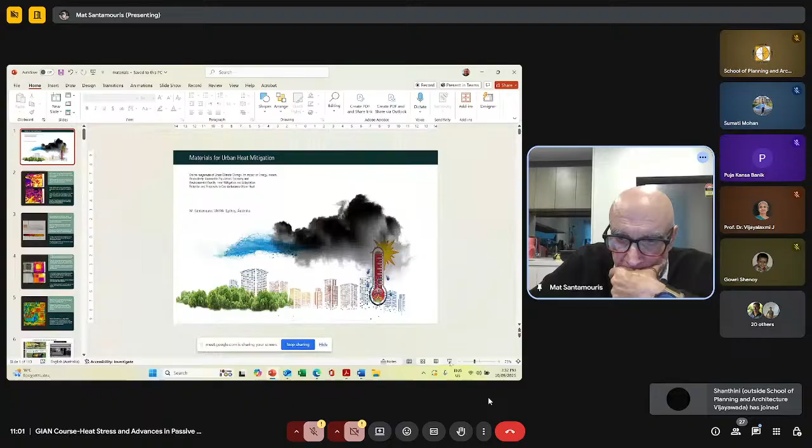So why is it important to discuss materials? Because the climate of the city is very much determined by the thermal and optical properties and characteristics of the materials used in buildings and also in urban structures. Materials determine the urban climate. Why? Because materials are characterized by an ability to absorb or reflect radiation, mainly solar and thermal radiation, and also because they have a capacity to store and release heat back to the atmosphere, heating or cooling down the atmosphere.

Materials used in cities are characterized by a reflectance, and the broadband reflectance is called albedo. The materials' albedo determines the albedo of the city, and an increase of the albedo has a direct impact on the energy balance of a building. Once we have large-scale changes of the albedo of the city, this may have very important indirect and direct effects at the city scale.

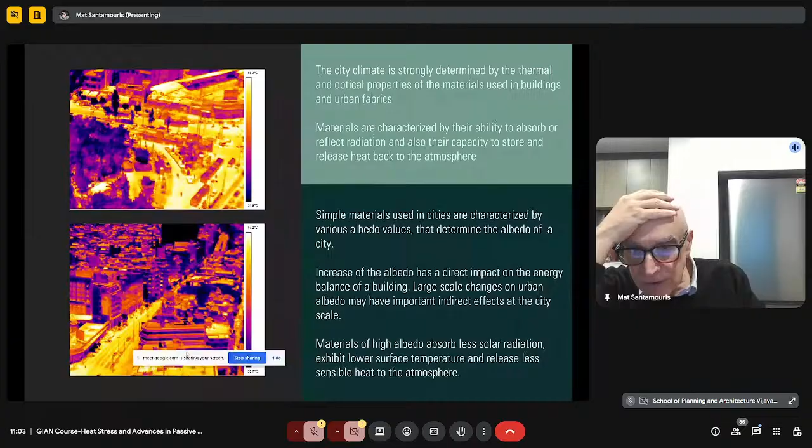Why is this? Because materials, once they have a high albedo, reflect a lot and can absorb much less solar radiation while reflecting much more. So they present a much lower surface temperature, and because of the lower temperature, release less sensible heat to the atmosphere and contribute less to the increase of urban temperature.

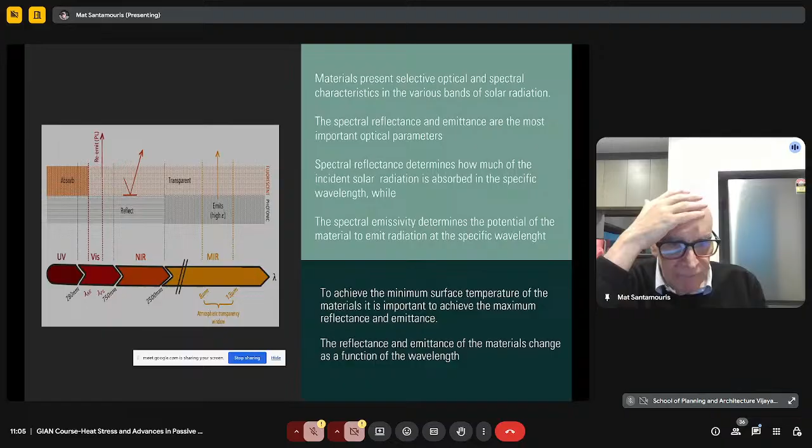Materials present very selective optical and spectral characteristics in the various bands of solar radiation. Let me present the main bands of solar radiation. We have UV radiation, up to 280 nanometers. Then we have the so-called visible radiation, between 280 to 750 nanometers. This is the part of solar radiation that the human eye can observe and understand. The human eye cannot understand the other bands of solar radiation. We have the near infrared, from 750 to 2500 nanometers, which is very important because it contains the same amount of energy as the visible part of solar radiation.

We can say that 50% of the solar radiation which comes to the atmosphere is in the visible, and the other 50% is in the near infrared. Of course it's not exact, it's almost 50%, but the impact of near infrared is extremely important. Then we have the mid infrared, which for our applications is not really relevant except if we have to do with the properties and characteristics of the urban atmosphere.

So we have to understand that each material has a spectral reflectance and emittance, which are the most important optical parameters. The spectral reflectance determines how much of the incident radiation is absorbed at a specific wavelength. The spectral emittance determines the potential of the materials to emit radiation at a specific wavelength. These are two very important properties that determine the thermal balance of the materials.

What has to be understood is that the spectral reflectance and also the emittance present different values at different wavelengths. The materials are selective, they don't have the same properties in the different bands of solar radiation. This is very important because it allows us to define which kind of parameters we want to use and how to use the materials. But the materials have to be considered based on their selective optical properties and not on their broadband properties.

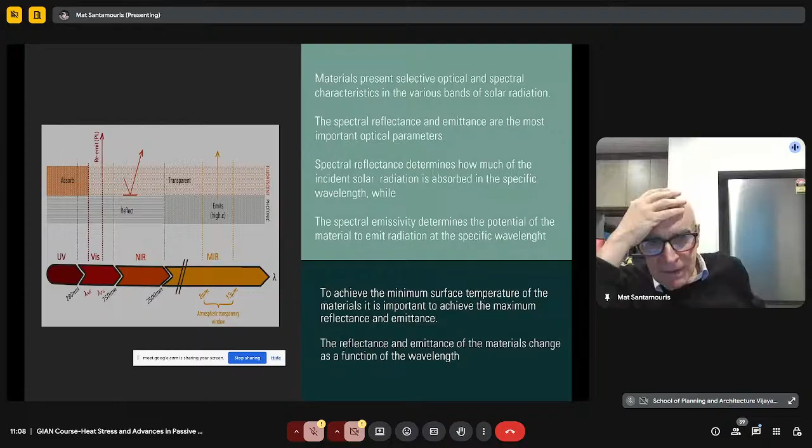The emittance of different materials is not the same. For example, concrete and other building materials present a quite high emittance. These materials can emit radiation back to the atmosphere and so dissipate the excess heat.

On the contrary, metals, for example, present a smaller, let's say, emittance, and they don't have such a high capacity to emit the solar radiation.

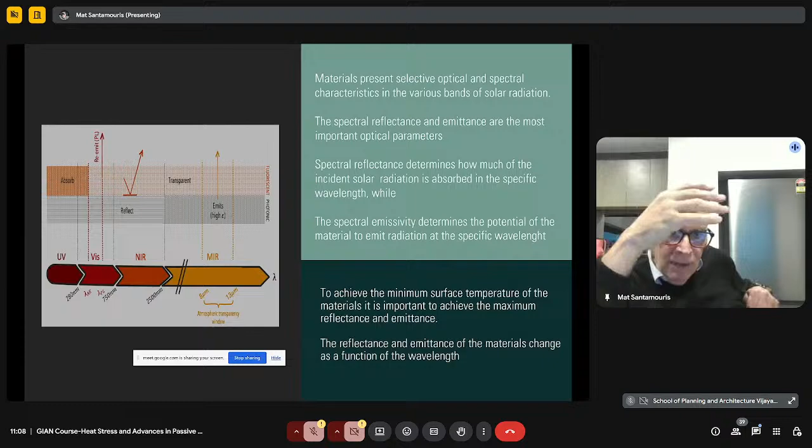What has to be understood also is that the emittance at a specific wavelength of a material is equal to the absorbance of this material at the same wavelength.

So if we take, for example, a material and we check how much this material may emit at a specific wavelength, for example, in the atmospheric window, 8 to 13 micrometers, we have to understand that a high emittance at this specific wavelength means a high absorbance also at a specific wavelength.

Which means that if really the material emits a lot at this wavelength, it absorbs also a lot at the same wavelength. So this is very important.

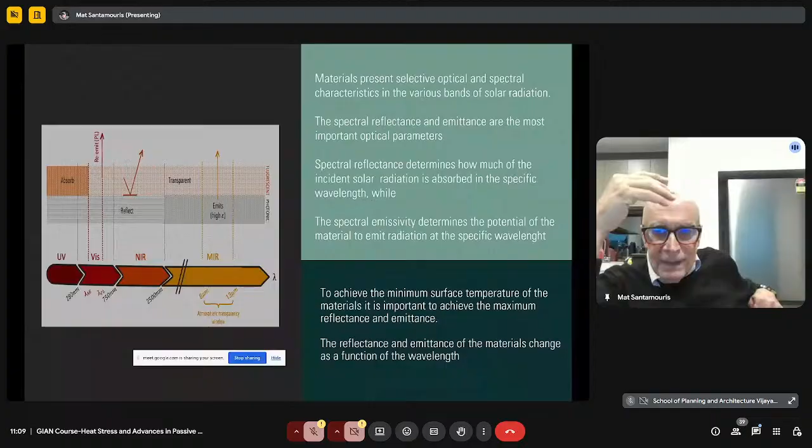This is the so-called Kirchhoff law that has to be understood in order really to design the proper way, let's say, materials for the urban environment.

In reality, the spectral reflectance of the materials in the visible wavelengths determine the color of the materials, because the human eye can really understand only wavelengths at the visible part.

And what really it gets back and characterizes the color, it is really the reflected radiation by the material.

So a material which reflects a lot, almost at all wavelengths at the visible spectrum, is a material which has a light color, can be, let's say, a white color.

Materials that really present a very high absorptivity, so a very low reflectance, these materials present, let's say, high absorbance, and these materials have dark color.

They are black. Then, if the materials reflect at the green, these are green materials, and so on.

But because this material presents in the visible part a high, let's say, absorptivity or a high reflectance, it does not mean that in the infrared they have similar, let's say, optical properties.

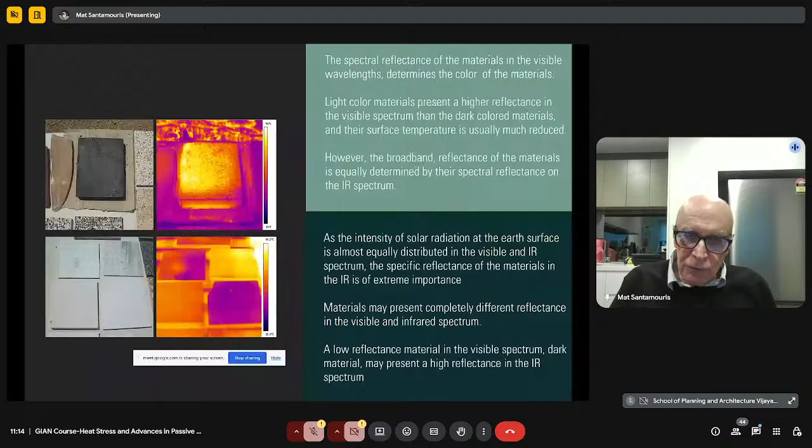So this is a very clear, let's say, message to you, and please remember it.

Given the different properties, we have really different broadband absorptivities and reflectivities. What means broadband? The global reflectance or absorbance of the materials - what characterizes the whole material. This is the weighted average of the reflectivity in different wavelengths, given also the intensity of the solar radiation at the specific wavelength.

A material which has a very high broadband reflectance is a material which presents low temperature, while a material which has a very high broadband absorbance may present a much higher surface temperature because this material really absorbs a lot of solar radiation.

Given these optical characteristics of the materials, we can really understand and measure their performance and temperature by using different experimental techniques, including remote sensing techniques like satellites, airplanes, drones, in combination with infrared thermography to measure their surface temperature.

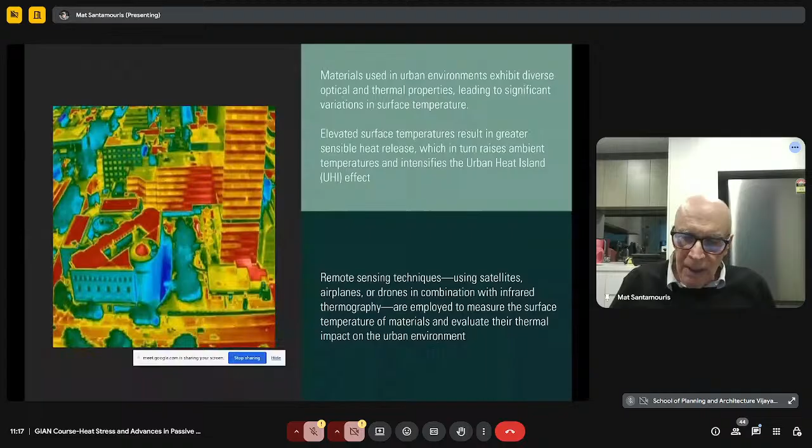This is very important, and this is the main technique used to perform experimental campaigns in the built environment. I'd like to show you some of these experimental campaigns we're using in my university, but these are very common everywhere in the world.

For all the experiments we're doing in the built environment here in Sydney, we're using a drone with a thermal and a visual camera. The drone may fly over the surfaces and take pictures of the surfaces. Then based on the characteristics of the surfaces, we can understand the temperature of the materials.

You see, for example, some pictures that we can take from the area. Of course, this is not so simple. It is not just what really the screen shows. We have always to correct for the proper emissivity of the materials.

For example, if flying a camera on a drone and you measure the temperature of metals, what perhaps you have really got is wrong, because metals present a low emissivity. So in this case, you have to enter the software of the thermal camera and make a correction of the thermal emissivity in order to get the proper value of the temperature.

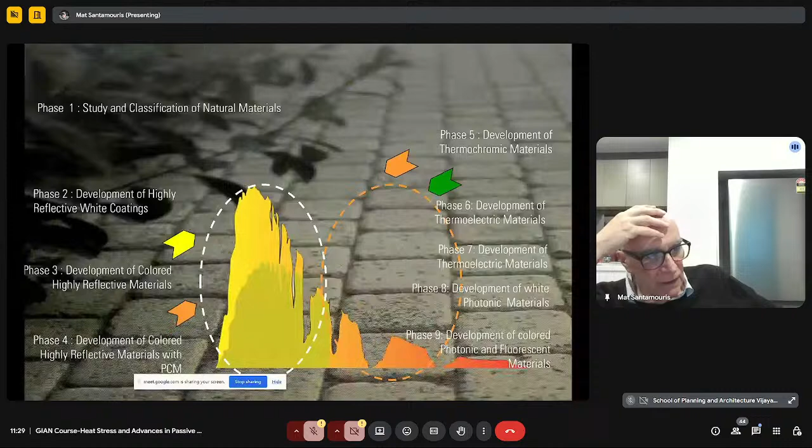Excellent. But many people said, okay, I can have a reflective cool material and put it on my roof, but it is excellent for the summer period. What about the winter period? During winter I wish to absorb solar radiation, not reflect it, because we have heating needs and the radiation has to be absorbed, not reflected. So what do I have to do? Paint the roof during the winter and then change the color during the summer.

Based on this requirement, many scientists developed the so-called thermochromic materials. Thermochromic materials change color or properties as a function of temperature. So during summer these materials can be very reflective, and during winter they can be very absorbing. How? We will see it later. These materials have been developed and have some problems, so they haven't penetrated the market much, but they have been developed.

Then there are other materials, thermoelectric materials, where once heated they generate electricity, or when they generate electricity, they store or release heat. There's a lot of research on this type of material, but fortunately or unfortunately, we don't have these materials ready for use in the built environment now.

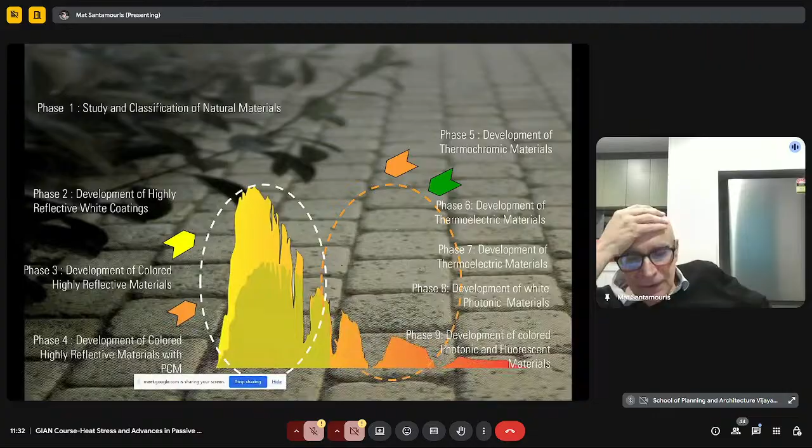And then the real revolution comes: photonic materials, materials which present very high reflectance and at the same time very high emittance. These materials present subambient temperatures. How? We will discuss it. These materials have been developed in the last 10 years, and they really allow subambient temperatures in cities. They are commercially available and behave like air conditioners without using any electricity. At the beginning these materials were white or silver, and because of the very high reflectance, they could only be used on the roofs of buildings.

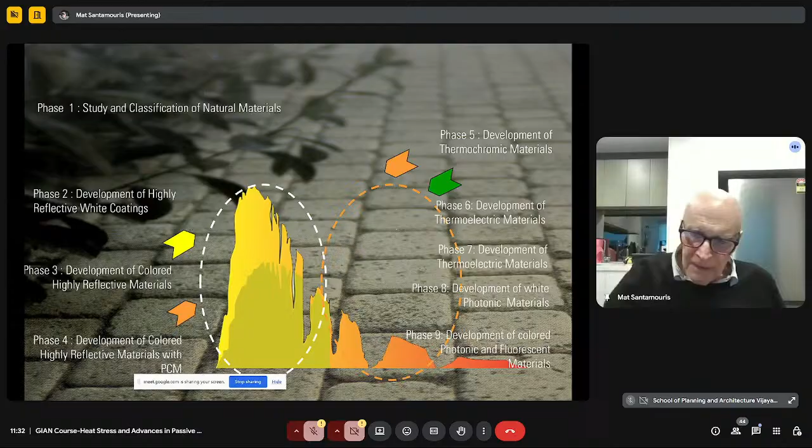But in the very last years, we have developed photonic materials which present very high thermal and optical properties but with color, meaning we can have very high optical performance and subambient temperatures, but at different colors. This is really a short history of what actually happens in material science.

We can also classify materials into three major groups, as done by many other people. For example, the natural cool materials, which include paving stones and other rocks, lime-based materials, and white pigments based on titanium dioxide, a very common material for paints, etc.

Then we have the modern cool materials: infrared reflective coatings, various white paints and coatings of high reflectance, thermochromic materials, and fluorescent materials, materials which because of fluorescence present lower temperature.

And then we have a third generation, the so-called supercool materials, which includes the photonic materials I presented before, photonic materials combined with fluorescent materials to give color, and also a new generation of materials not yet well developed, the so-called caloric materials, which we don't have time to go through.

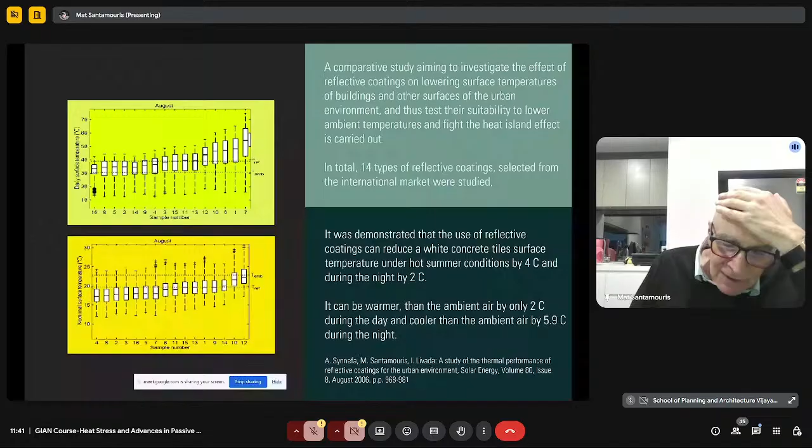So the message is clear. We have white materials which are of very high performance, and we have white materials in the market which are of lower performance. For heat mitigation properties, we use only materials which present very high reflectance and very high emittance.

If you buy and use low emittance paint for your roof, you will not have a cool roof. You will have perhaps low absorption, but the temperature will not be so low as in the case of other materials. This is very clear once we use it in urban applications.

So pavements are really the best clients of this kind of coatings. The thermal performance and the thermal balance of these materials is really determined by how much heat is absorbed, how much heat is reflected, and how much heat is emitted.

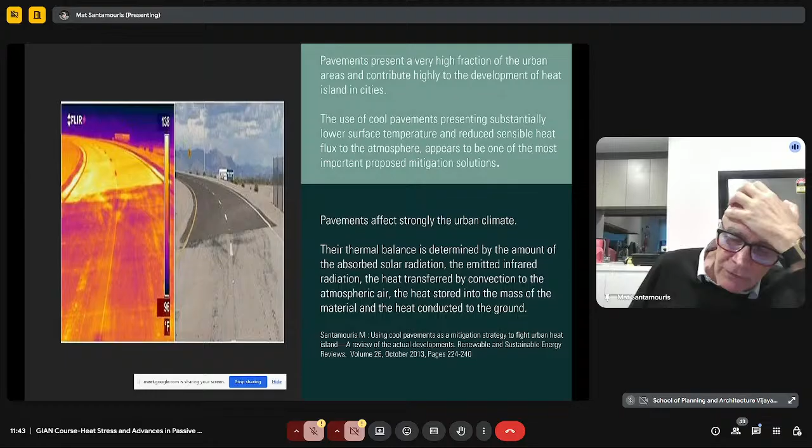You see the temperature difference at your left between a dark asphalt and a white asphalt. The black asphalt presents almost 40 degrees, maybe more, higher temperature than the gray material. This has a tremendous impact - in degrees Fahrenheit, I'm sorry - a tremendous difference that determines the thermal balance and finally the temperature in the built environment.

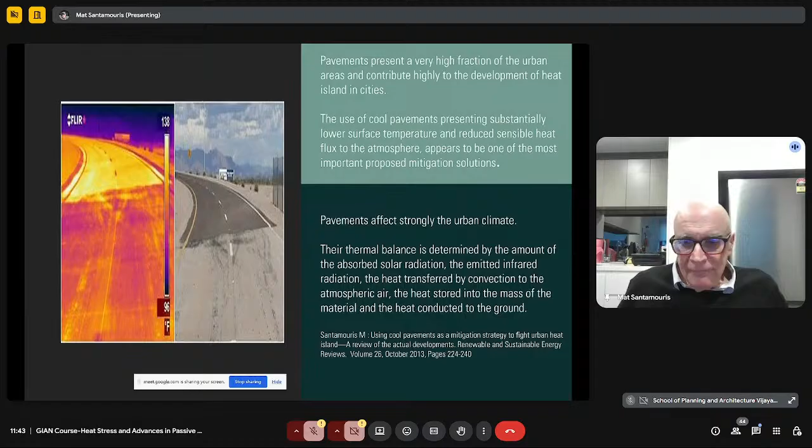So in order to decrease the temperature in the built environment in our cities, about 10 years ago, we started really to paint streets and pavements. The biggest implementation of these cool pavements happens in Los Angeles, California, but also in many other cities around the United States, and also in the Gulf.

You see, for example, an application that happens in the United States. There is a very important program that really tries to decrease the absorptivity of the materials and structures in the United States, and especially in the southern parts where it is much warmer.

Actually, the application and implementation of reflective materials at the urban scale offers tremendous possibilities and opportunities. The measured decrease of the temperature is of the order of magnitude of 0.4 to 0.5 degrees on average. In some cases, we have much higher.

However, it is very important when cool pavements are used to consider the optical annoyance. Why? Because drivers, if they have to look at reflective pavements, may have strong problems and serious issues with glare and contrast, and this may create accidents.

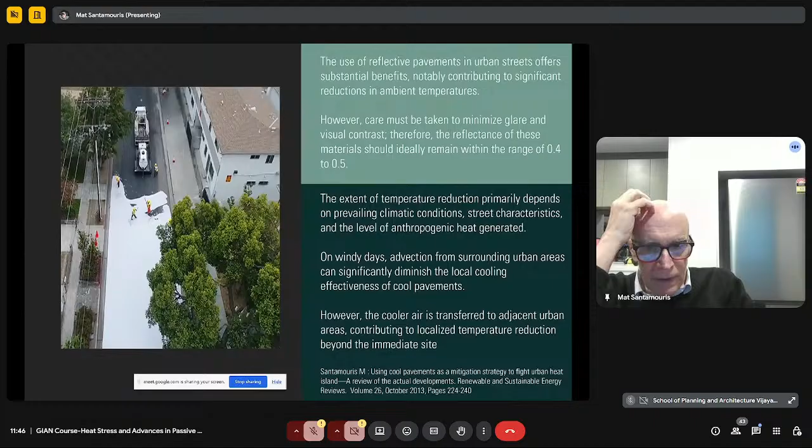Now, in the Gulf area and in many other parts of the world, they started using this technology. In my opinion, the materials they are using in Los Angeles are very reflective. The excuse they have is that after 3-4 months, because of aging, the materials are losing a lot of reflectance, so in this case you don't have a problem of optical annoyance.

Another important problem here is really the advection of heat, because during a windy day, the heat or the air is coming to the street from the adjacent streets.

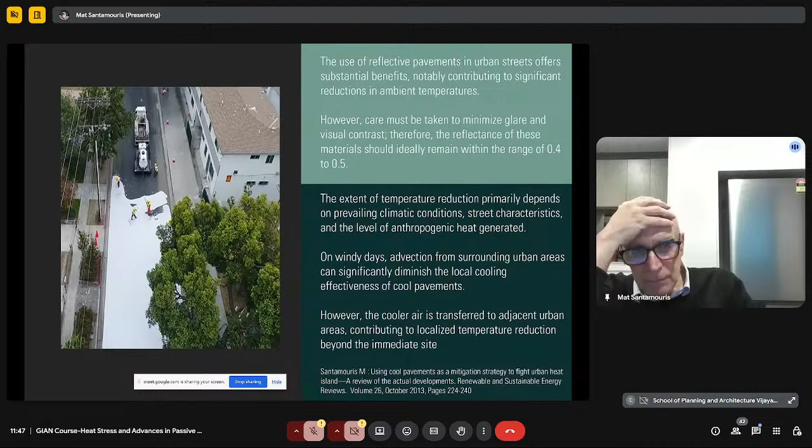So what you get really as a thermal feeling is not the temperature of the air above the pavement, but the temperature of the air coming from the previous street. So to understand the impact of the cool pavement on the next street, the air above the pavement is transferred because of the motion of the wind. This is called advection, and this is very important. This is the reason we need not just one street, but an extended application of these materials to cover most of the city.

Apart from cool pavements, which use these first generation materials, we have the so-called cool roofs. You see, for example, in New York, a large area of buildings with cool roofs that reflect solar radiation, reject heat, and in this case we have much lower temperature.

Of course, the performance of cool roofs depends very much on the ambient temperature and humidity, wind speed, precipitation, and many other things. And of course it depends very much on the optical parameters, properties and characteristics of the material used. We have to use materials that present very high reflectance and very high emittance.

Which is the performance of cool roofs? I will show you some examples, starting with an experiment we did 20 years ago in Athens, when we developed for the first time the cool roofs and cool materials. We installed, on the roof of a school, a cool roof.

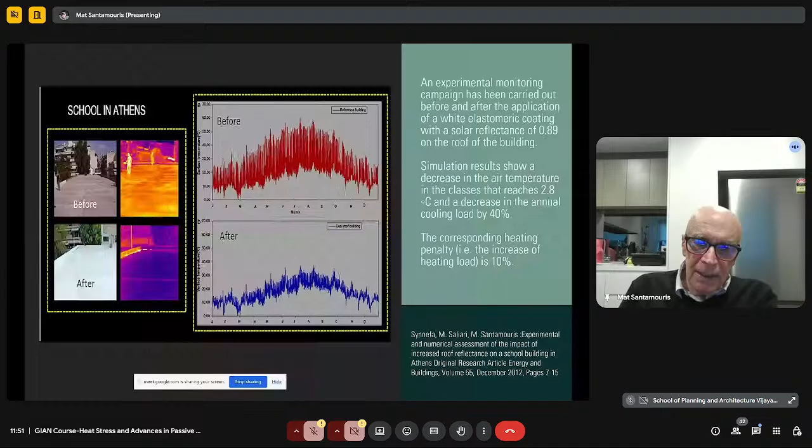This is extremely important. When we measure the associated cooling demand and cooling benefits from installation of cool roofs, we found that the installation of the cool roof in the school decreased the indoor peak temperature during summer by up to 2.8 degrees, extremely important, and also decreased the cooling needs of the building by 40%. So cool roofs provide very important benefits regarding dissipation of heat to the atmosphere and also cooling needs and thermal comfort inside buildings.

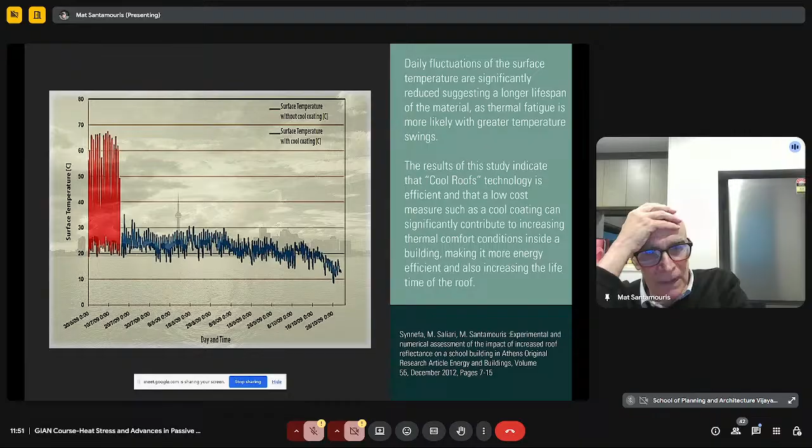I'd like to show you, in a comparative way, how the temperature was before - these are real recordings, the red part - and how the surface temperature changed after installation of the cool roof. You see there is a tremendous temperature difference. I know that in India there is a national program of cool roofs for schools, and this is very useful, an excellent way to improve comfort, decrease cooling needs, and provide the best possible quality of life to the students.

Can we use cool roofs in temperate or cold environments? We tried this in an industrial building in the Netherlands. The Netherlands is a cold area - during summer temperature may be quite high, but during winter you may have temperatures below zero. So we installed, on the roof of an industrial building, a cool roof system.

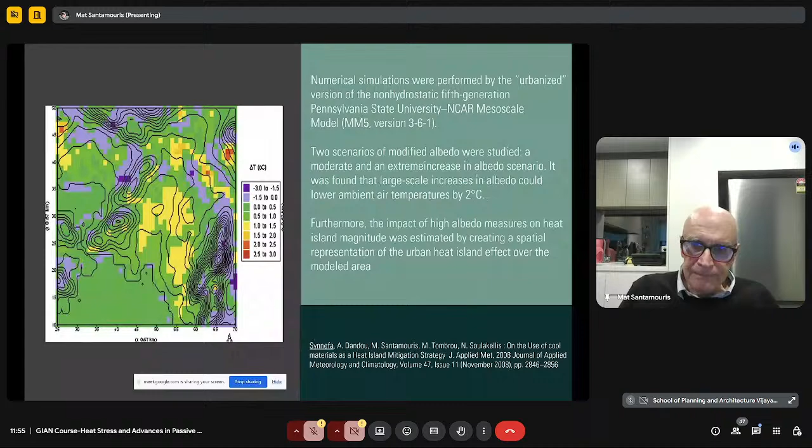The most probable decrease you may have with extended implementation of cool roofs in a city will be close to 1.5 degrees. This is another study we performed for the Ministry here in Australia, trying to understand the cooling potential and characteristics of cool roofs all around Australia. We simulated the energy performance and climatic performance of cool roofs in 6 major Australian cities, understanding the expected decrease in temperature, the energy impact, and more, together with the help of our friends from the University of Calcutta.

What we found is that in Australian cities, especially Sydney, we may decrease the peak summer temperature by 1.5 degrees. You may tell me that's not so high, but I can tell you it is very high, because 1.5 degrees may correspond to a cooling demand reduction of 25%. So 1.5 degrees is really very high and contributes a lot.

But we don't have exactly the same performance everywhere. For example, in a warm climate like Brisbane, the average decrease in temperature may be much higher than 1.5 degrees - maybe 1.7, 1.8, and in some areas up to 2.5 degrees. Cool roofs work very well in warm climates, and also work well in less warm climates like Melbourne. In Melbourne, which doesn't present such high summer temperatures like Brisbane, the expected decrease in ambient temperature is close to 0.7-0.8 degrees.

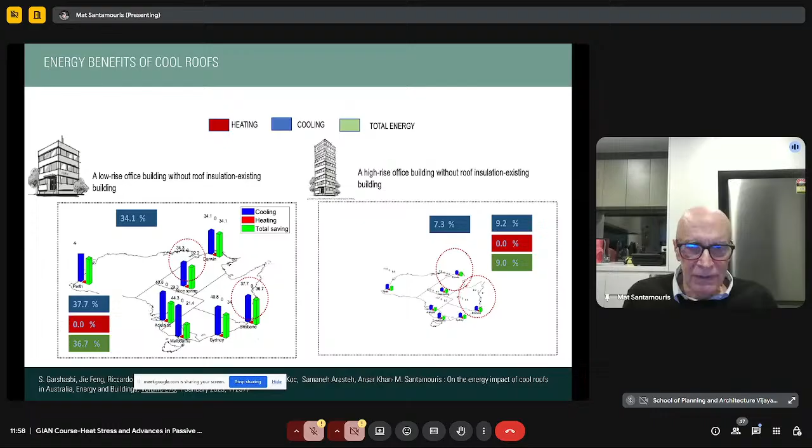But for a high-rise office building, the benefits are much less, close to 7%, because you only have benefits in the upper part of the building, with some penalties from heating. So benefits are close to 7%, but don't underestimate this 7% - it's really very important. It's not only about cooling load, because not all buildings are air conditioned.

We have free-floating buildings, and in India, most buildings are free-floating. It is very important to decrease indoor temperature, especially during summer. We measured and calculated the maximum decrease of indoor temperature from implementation, and we found that in a non-air-conditioned, free-floating building it's possible to decrease the indoor temperature by up to 10 degrees.

So it is of extreme importance, and this is measured - it's not something that is just calculated. It is of extreme importance to consider that we can have much better indoor conditions and save lives because of the benefits.

If we compare the cooling benefits against the heating penalties, you will see, for example, that for tropical climates like Darwin, the cooling benefit is tremendous, 90 kilowatt hours per square meter per year, and the heating penalty is almost zero.

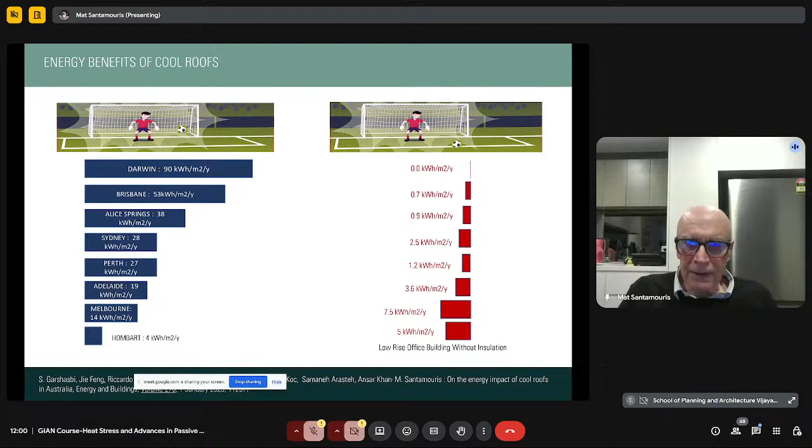We've calculated that the large implementation of cool roofs in Australian cities may increase the performance of air conditioning by almost 10% or a little higher. So 10% better performance means a lot of energy, means much lower cost.

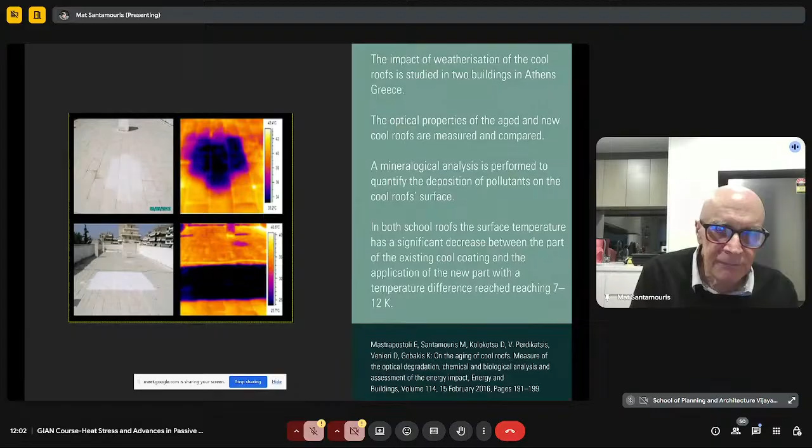However, cool roofs are not free of problems. Because of aging and the deposition of dust and other particles, cool roofs lose their optical properties - we have a problem of weatherization or aging.

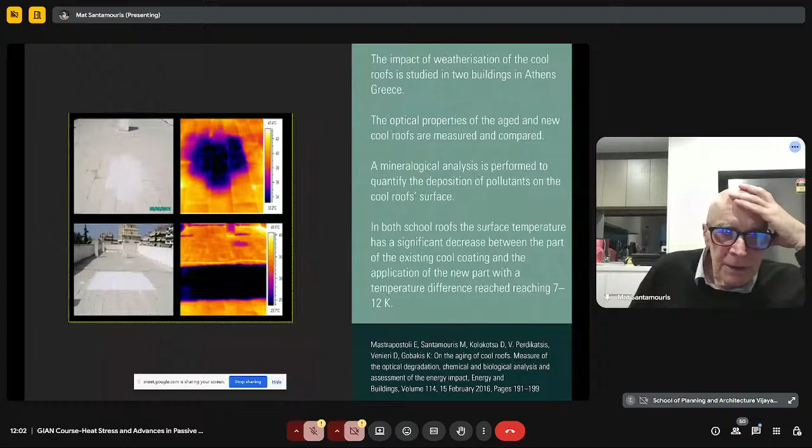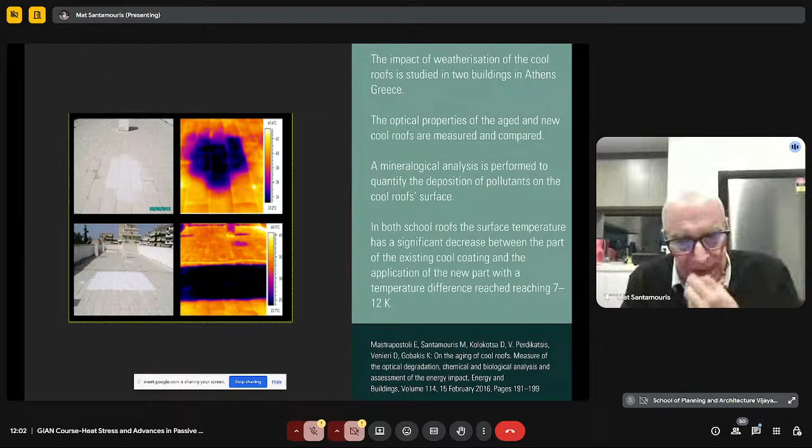For example, in one experiment, we installed a cool roof, and after some years we measured the optical degradation of the cool roof and compared it with a fresh cool roof. There is an important difference, and this shows that cool roofs have to be maintained and at the same time improved in performance every 3 to 5 years, depending on the material used.

An important issue to consider is that cool roofs, because of the deposition of dust and aerosol from the atmosphere, especially in polluted atmospheres, create problems of microbiological pollution. Microbes, pollutants, and fungi that exist in the atmosphere are deposited on the surface of the cool roof and may create areas with higher microbe concentration. Analysis has shown this can be risky, especially in schools, for kids if they go there and put their hands on it.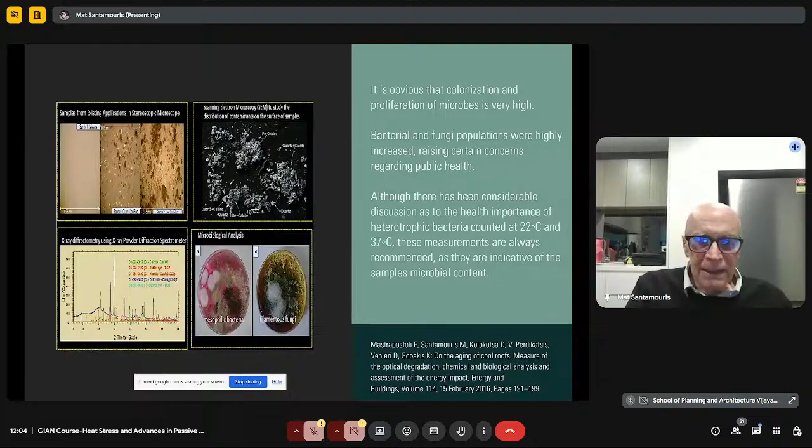So from time to time, for example in India, where unfortunately most cities have very high pollution, the cool roofs have to be cleaned with just water, or they have to renew the material used. It is very important to consider that we may have optical degradation.

Before stopping for the break, another important benefit of the cool roof, especially when associated with photovoltaics: because of the reflectance of radiation and the lower surface temperature, they tremendously improve the performance of photovoltaics. We've seen that the use of cool roofs in areas with photovoltaics improves the performance of monofacial photovoltaics up to 6%, and bifacial photovoltaics up to 16%.

The benefits of cool roofs in India - there is a very nice study done by the Rocky Mountain Institute which calculated the performance and benefits of cool roofs in India. As I told you yesterday, and I repeat it today...

The wide implementation of cool roofs in India may save up to 317,000 lives and is associated with 68 million tons of CO2 reduction. At the same time, it may help provide an average of 186 additional labor hours per household per year, which means a lot of additional income for these people.

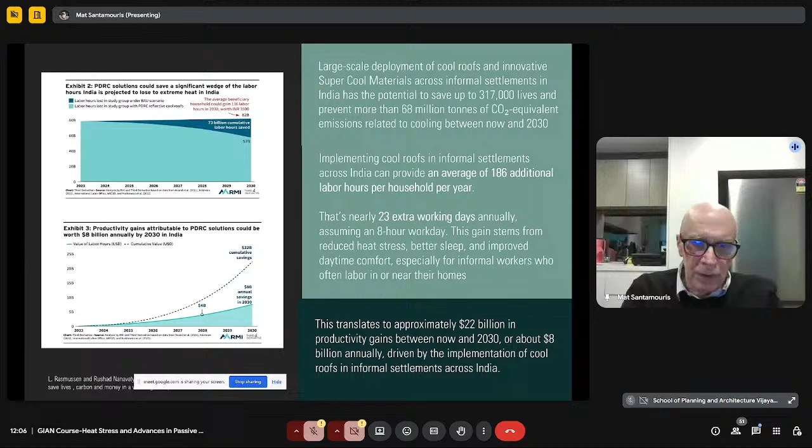Fortunately, in India, excellent materials for cool roofs are industrially produced and you can use them. So it has a very high added value for the country.

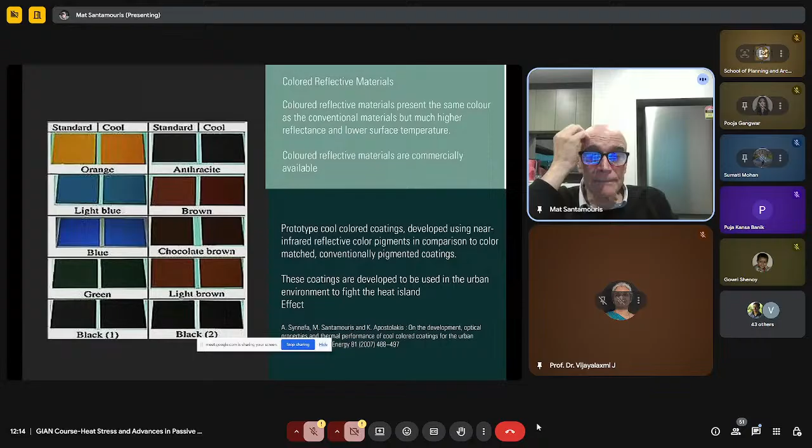So we move to the second generation of materials, reflective materials which present really low temperature. These are the cool color materials. You see, for example, materials of standard, normal, conventional fabrication at the left, and the cool materials, the reflective materials, at the right. They have exactly the same color.

Why? Because we don't really change the optical properties in the visible. If we don't change the optical properties in the visible, we don't change the color. But what we change are the optical properties of the material in the infrared. For example, let's take a yellow material. The optical reflectance of the yellow paint in the visible is the one shown there.

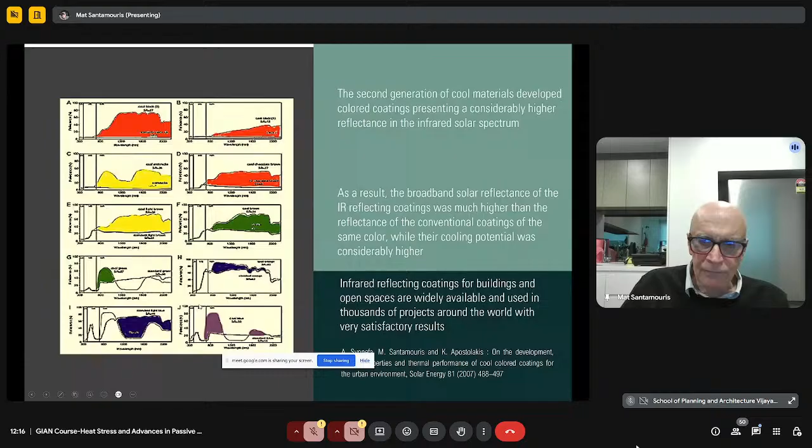We don't change this, because if we change the reflectance in the visible, we change the color. But in the infrared, and I remind you that 50% of the radiation is in the infrared, the reflectance of the conventional material is this one. We have succeeded to increase the reflectance of the materials in the infrared. So in this case, we have tremendously increased the broadband reflectance of the material. And this is for the red, this is for the black, this is for the green, this is for every color. See the result, the comparison of two black surfaces.

This one is conventional, and this one is reflective. This one presents about 25 degrees higher temperature than the reflective one. Also watch and compare the surface temperature of a reflective against a conventional blue tile. You see that the difference is about 15 degrees.

So how is this achieved? By using infrared reflective pigments in the mass of the materials. In this case, we have a tremendous temperature difference. For example, for materials of low solar reflectance, black materials, we may achieve to decrease the surface temperature up to 10 degrees. These materials are commercially available. You can buy them from everywhere, extensively used all around the world, produced also in Israel and in India, and present very high performance and very high stability.

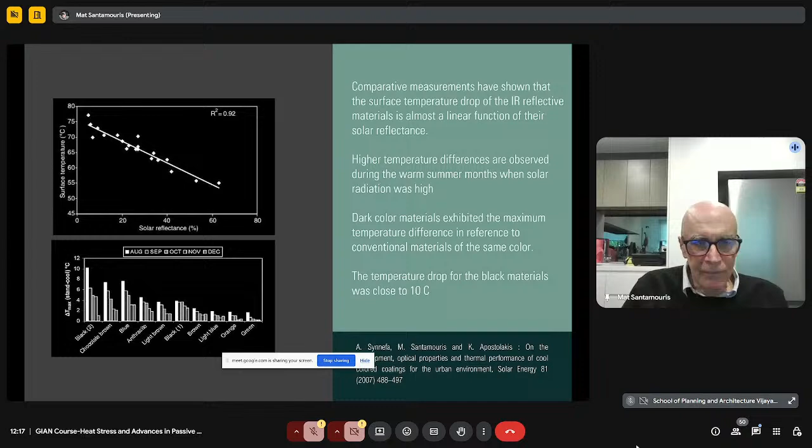These materials can be used for roofs, for tiles, etc. I will show you one of the first applications we had in Europe about 15 years ago, where we rehabilitated an urban park. The temperature in the urban park before the rehabilitation was quite high during the summer, up to 35-36 degrees. This was really the ambient temperature.

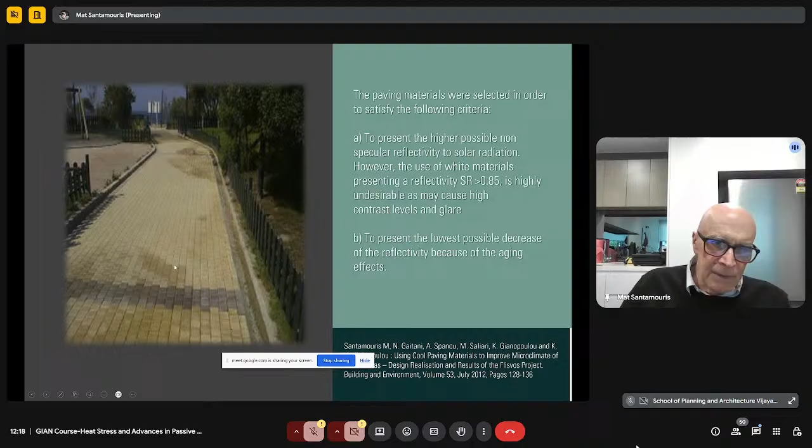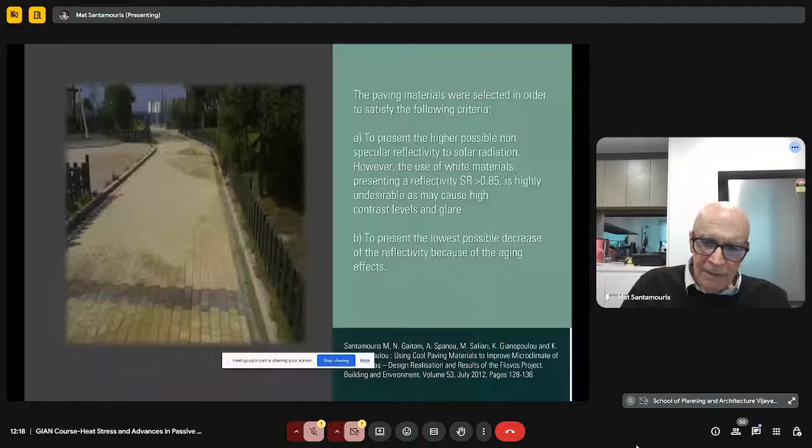To rehabilitate the park, we developed some infrared reflective tiles. These are tiles used in the park, but they are infrared reflective. They have exactly the same color as the conventional ones, but once we compare their temperature difference, it is really very high. For example, see the temperature of the old pavements of the same color compared to the reflective pavements: about 7-8 degrees lower surface temperature.

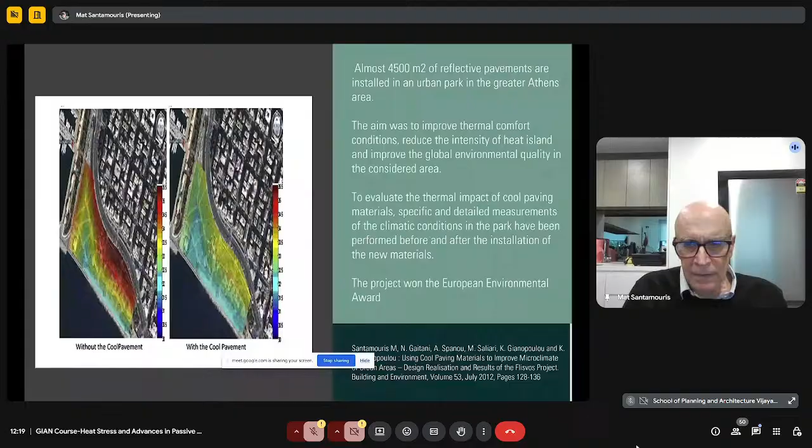As a result of implementing these materials, we succeeded to decrease the temperature in the coastal area by 2 to 3 degrees. And this is a real project. This happened at the beginning of the new century, the end of the old one. This was the very first implementation of cool materials in Europe, and the project won the European Environmental Award.

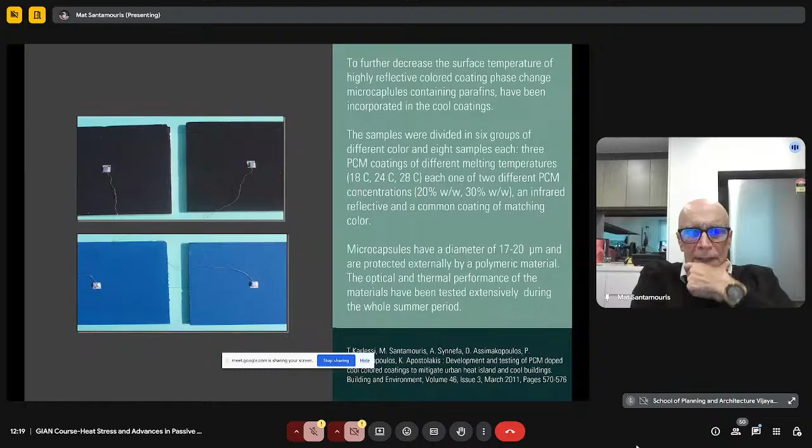These materials exist in the market, are produced, and are also commercially available in India and produced in India. To further enhance their performance, we included phase change materials (PCM) in the mass of these paints. By using PCM, we increase the capacitance of these materials so they can keep the heat inside their mass.

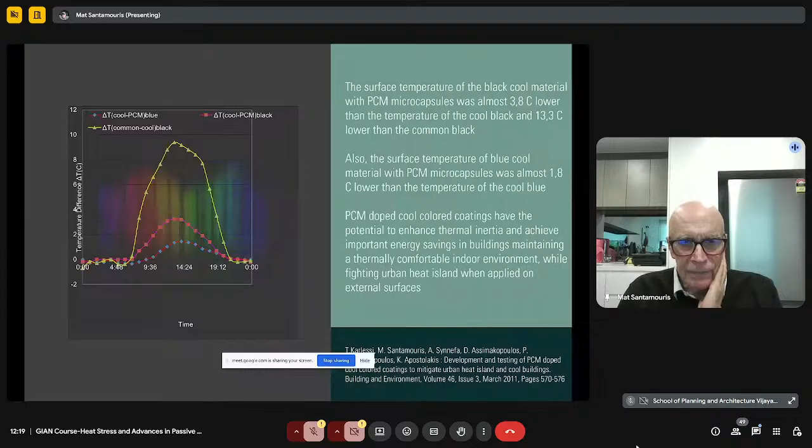These materials have been developed, and you see, for example, the ambient temperature tested, the temperature difference of the conventional materials, and the temperature difference of the PCM materials compared to the conventional materials. By using these materials, we can further decrease the surface temperature of the infrared reflective color materials I presented before, by 3 degrees.

These materials are also available in the market and used for tiles all around the world. However, one of the major issues is the use of dark surfaces in streets. You see what is happening in Los Angeles, where they coat the street. But by coating the street, you have to do it every 1 or 2 years, and there is important aging. Is it possible to develop cool asphalt materials which have a lower temperature?

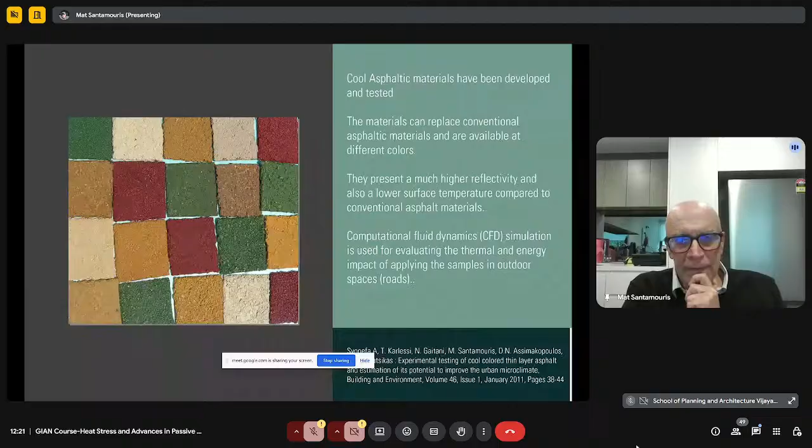These materials were developed 15 years ago using infrared reflecting pigments in the mass of the material, and you can see the performance. You see the visual image of these materials and their temperature. There's a tremendous difference between black asphalt, which has temperatures around 80 degrees, and an asphaltic material with exactly the same mechanical properties but temperatures 40 to 50 degrees lower.

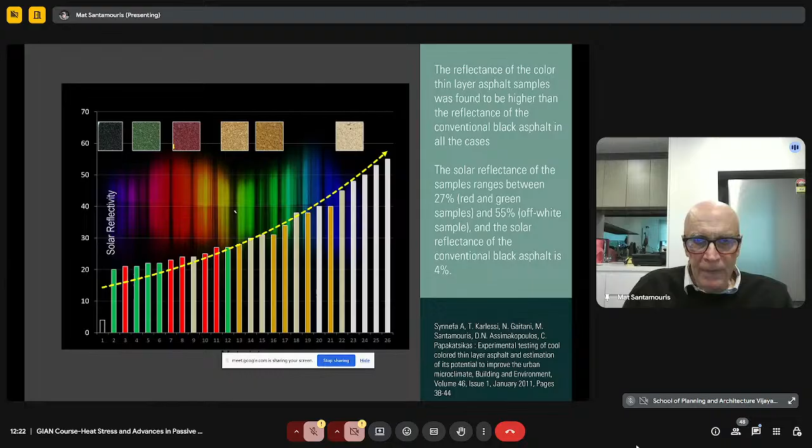These materials are now used for pavements and streets all around the world and present much lower surface temperature. We have a variety of these materials where the reflectance of conventional black asphalt is 4%. Now we have materials which present up to 55% reflectance with exactly the same mechanical properties.

I'd like to show you a project we had in Athens about 10 years ago, before moving to Australia, where we had an extended implementation of these asphaltic materials in the center of Athens. This was a project of 35,000 square meters, a very big project. We used these materials and succeeded in decreasing the surface temperature of the street by about 11 to 12 degrees, and decreased the air temperature in the street by 1.5 degrees. This is a very high performance with very high results.

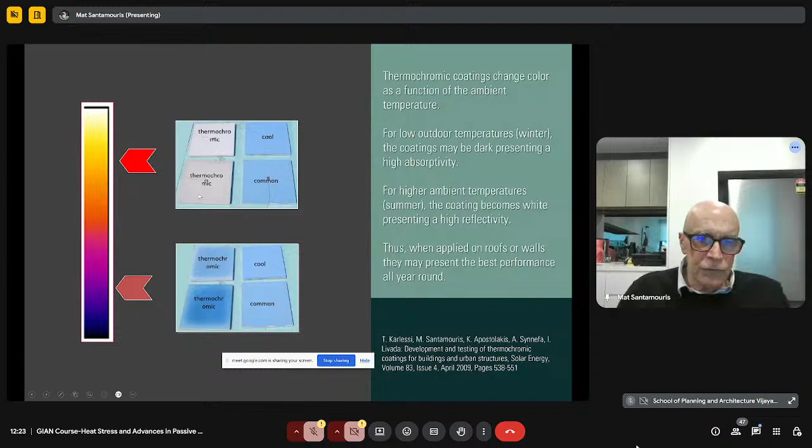But this was done 10 to 15 years ago. Research continued, and many researchers tried to develop smart materials that may change color as a function of temperature - these are thermochromic materials. Thermochromic materials may have any color you wish when temperature is low, and become white during the summer period. So they change color, and thus change their optical properties and their surface temperature.

These materials are developed, and I'd like to show you the comparative results against conventional materials, the cool materials I showed you as second generation materials, and also the thermochromic materials. With the thermochromic materials, we succeeded in decreasing the surface temperature by up to 21 degrees - a tremendous performance and a tremendous impact.

These materials are commercially available, but they have a small problem: fading, or fast weatherization. They lose their optical properties very fast. After 3 or 4 months, they may fade. They may lose their color, and from any color you may have, for example a pink one may become white. So they are losing their properties.

In recent years, there has been important research that we carried out, and we found optical filters which are now used on the surface of thermochromic materials. You can see that after, for example, 30 days, the loss was almost zero. So there is a very good opportunity for these materials in the future.

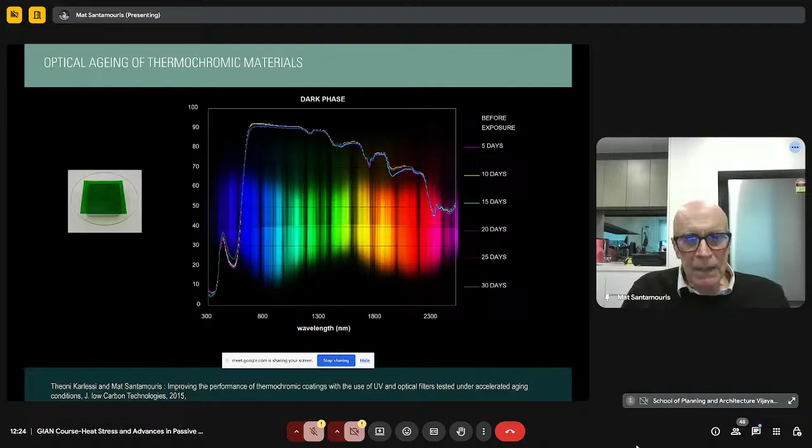But although these materials started to become commercially available and are produced mainly in China, unfortunately the development of the new generation of materials, the so-called photonic materials, has almost stopped the development of this technology. So we move to the very last technology of materials, which in reality is a new generation.

Yesterday I explained a little bit the idea of the photonic materials. The idea is based on the development of materials with very high reflectance, up to 95%, but materials that once they emit, imagine that this is a material - when a conventional material is emitting, the emitted radiation goes up to the atmosphere, but because the atmosphere is full of gases, pollutants, aerosol, etc., this radiation is absorbed or reflected and re-emitted back. So in reality, a very high part of the emitted radiation returns back. In this case, you don't have so many benefits - you have benefits, you've seen them before, but not a tremendous performance.

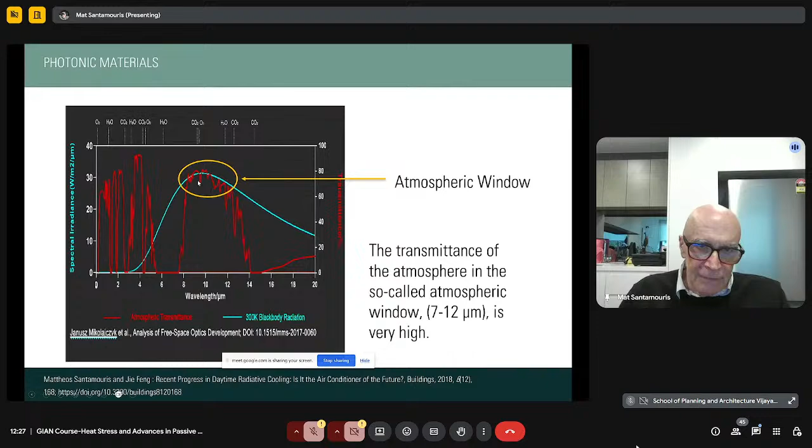This was the idea, and it means these materials should really emit a lot in these wavelengths, in the atmospheric window. So you see the emittance and the transmittance of these materials - in the atmospheric window, these materials have a very high emissivity.

These materials started 10, 12 years ago, maybe a little later, for different applications - electronics, health applications, etc. - the so-called metamaterials. These were materials of extremely high cost, very expensive, very sophisticated, difficult to use for building applications, and difficult to develop at the same time.

These materials succeeded in emitting in the atmospheric window, and as a result, they presented subambient surface temperature. But the first generation of photonic materials was really not appropriate for the built environment.

In the last 5, 6, 7 years, we have succeeded in developing photonic materials for the built environment. These materials are composite materials - they include components which help reflect up to 95% of the solar radiation, but also emit at the atmospheric window.

These materials, developed in the last 5, 6, 7 years for building application, present up to 15 degrees subambient temperature. I'd like to show you some of the materials we developed here at UNSW 3 to 4 years ago with my students.

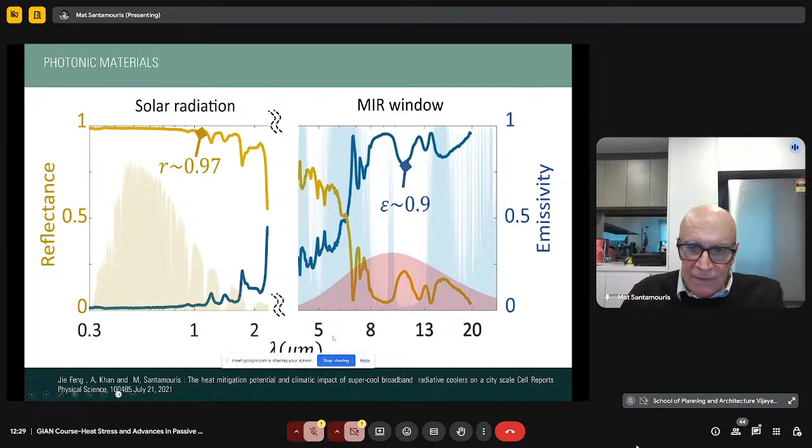These were really composite materials. It's not so important to show the chemical composition and how these materials are used, but they had a very high solar reflectance, 97%, and a very high emissivity in the atmospheric window, 0.9. These materials were tested under the Australian sun in desert conditions for an extensive period.

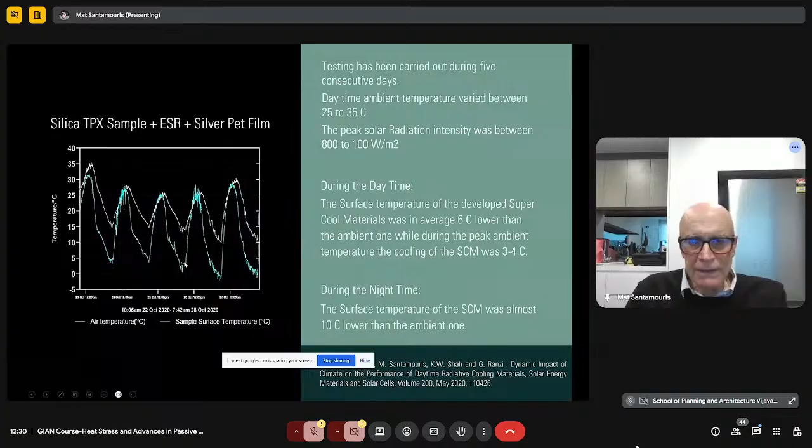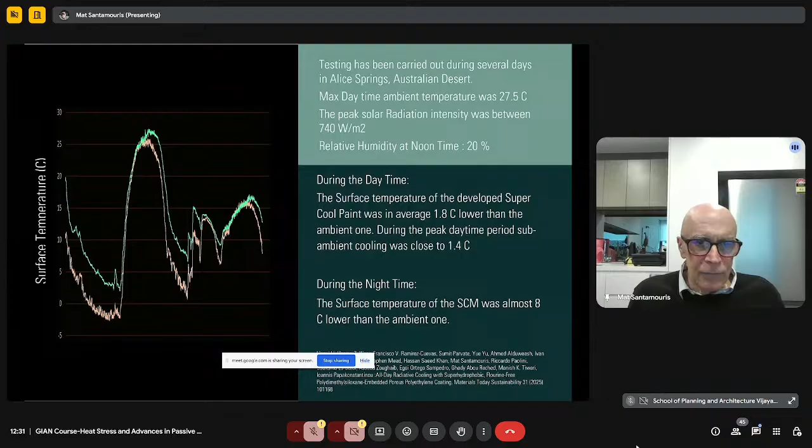I'd like to show you a video. These materials are now used in London by the red buses. They use these materials in order to reflect solar radiation and also decrease the temperature inside the bus and minimize the use of air conditioning. I'd like to show you this small video - hope it works.

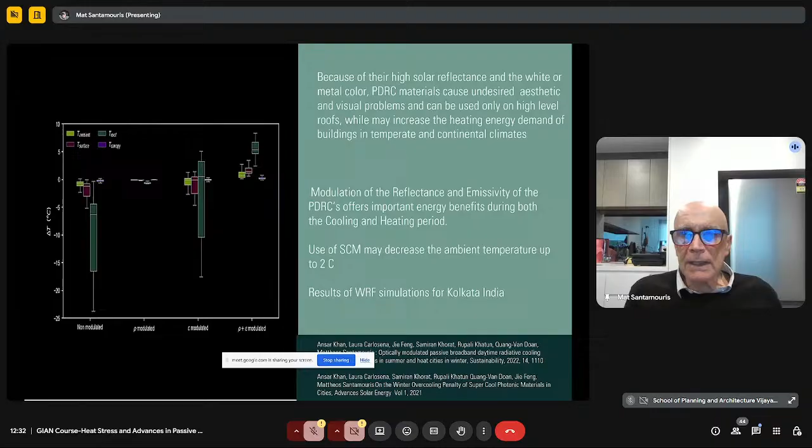From many buses this summer, and now we analyze to see the performance. The performance seems to be very promising. This is a new paint that is going to be commercially available next month.

But is there a problem with these materials? Yes, there is. Because of the very high reflectance and the very high emittance in the atmospheric window, when these materials are used in temperate climates, they may impose important winter penalties. The analysis we performed together with colleagues from the University of Calcutta shows these materials may decrease the temperature during summer up to 3, 4, 5 degrees at the city scale, but may also decrease the temperature during winter time up to 2 degrees.

This is an important problem because the heating penalty may be significant. Is there an alternative to this problem? Can we solve it? Yes. Recent research has developed new materials which do not present such a high reflectance. By reducing the reflectance of the materials, we have a better aesthetic performance, but at the same time we don't lose the optical benefit, and we decrease or completely minimize the heating penalty. How can this be done?

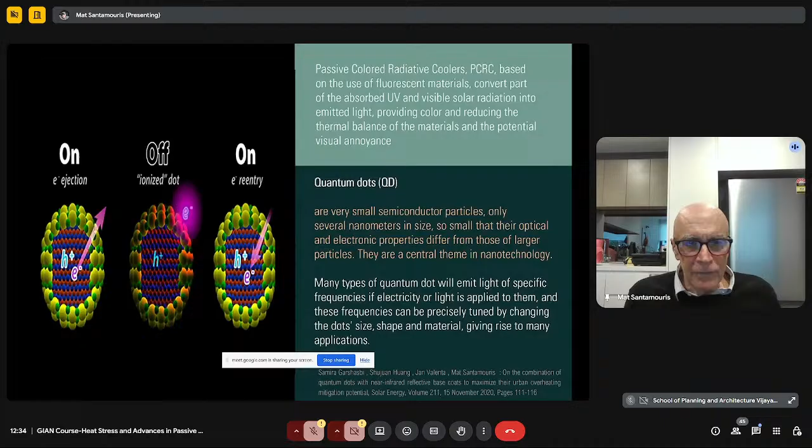These quantum dots and other fluorescent materials have been integrated into the mass of the photonic materials we had. The result was, first, that we decreased the reflectivity, but also, because these fluorescent materials constitute pigments and pigments absorb a lot, we have colored photonic materials.

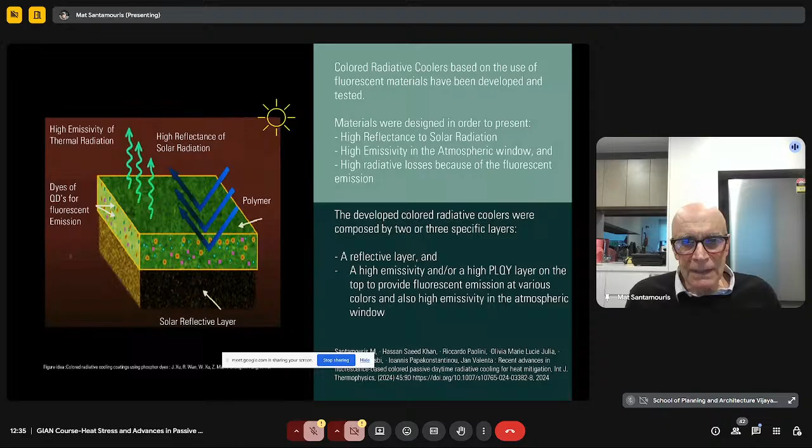So by developing color photonic materials, which are composed of three layers: a solar reflective layer, a fluorescent layer, and an emitting layer. We have the reflecting material in the lower part, the fluorescent layer which emits fluorescent radiation and gives the color, and another layer which increases the emissivity in the atmospheric window.

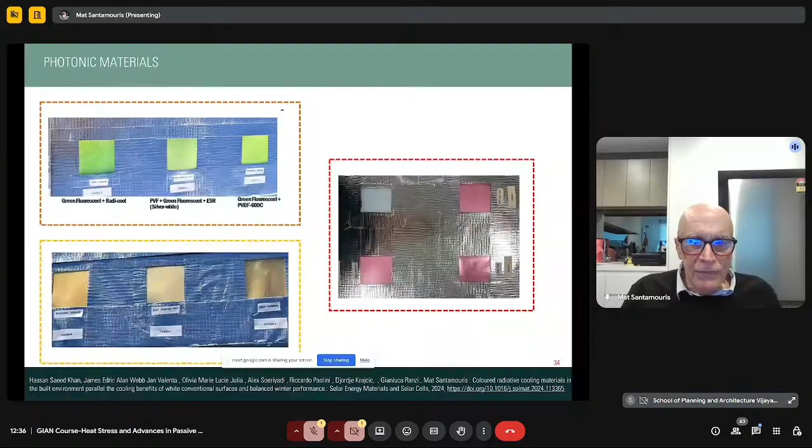We have developed different color materials combining fluorescence and photonics. I don't want to show you all the details, I'd like to show you just the type of materials. These are plastic materials, but they can be paints, whatever you want. And these are the properties.

You see that the emissivity in the atmospheric window is very high. The reflectance is close to 97%, and they also present a very high fluorescent capacity, which means they re-emit immediately the radiation which is absorbed.

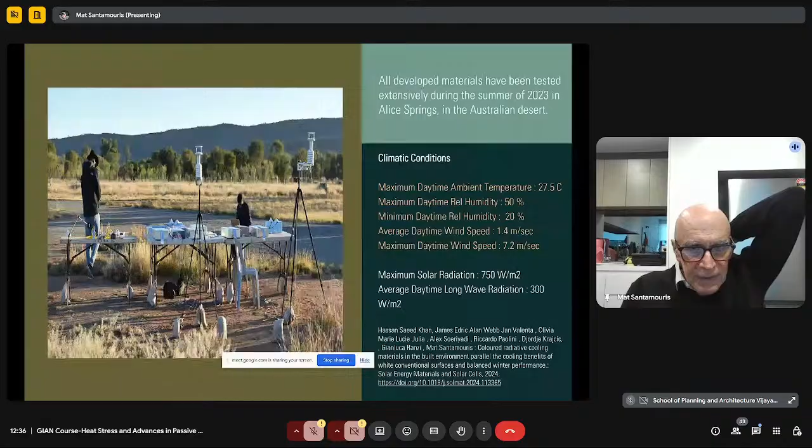These materials were tested last summer in the Australian desert. You see the measurement equipment. I'd like to show you some of the results. For example, we tested in a comparative way the conventional super cool white materials, photonic materials with subambient temperature, the color fluorescent photonic materials, and the conventional materials.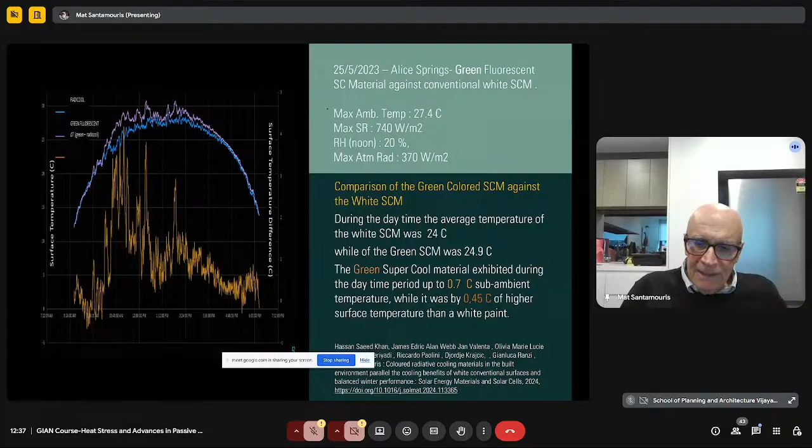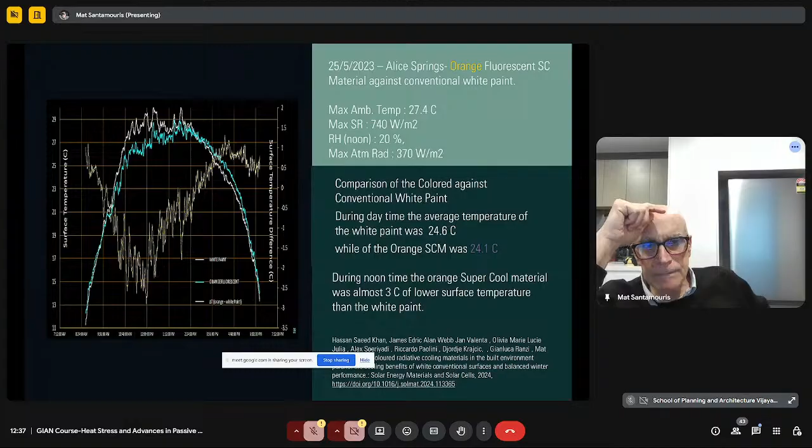However, what is very important, and I'd like to show you, is the comparison of these color materials against conventional white paints - good conventional white paints. Imagine an orange color material which presents 3 to 4 degrees lower surface temperature than conventional white paints. So now in the built environment, we have the technological capacity to use any color we wish at very low surface temperature with very high cooling performance.

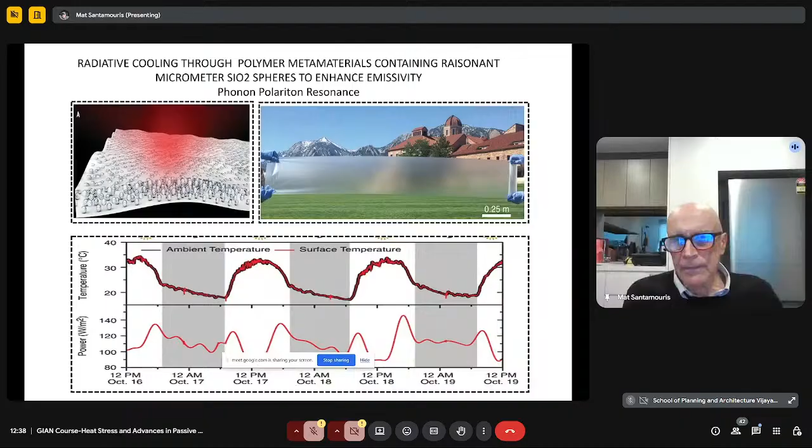Same results for different types of materials. Also, other researchers have developed photonic materials in the form of plastics. For example, a material developed at the University of Colorado is a plastic material which presents up to 15 degrees lower surface temperature than the ambient one.

Actually, there's an American company that has developed smart shading devices which are extensively used all around the world, composed of photonic, moving shading devices.

I'd like to show you a small video. I hope it works. I have... the advertisement. I'm sorry about this, I can't stop it.

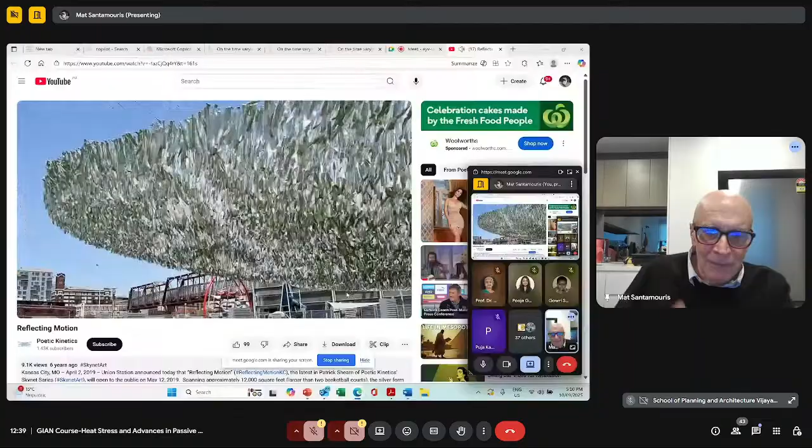So you see this flying shading device. This is, if I'm not wrong, in Kansas City. You can have this flying. The components are fluorescent metallic components which can be extended the way you wish and can provide shading. But it's not only that these materials provide shading—the surface temperature of these materials is 10 to 15 degrees below the ambient one, so they provide cooling. Once you are below this material, you receive the coolth from these materials. So you can have shading at any place you may wish, and along with the benefits of shading, you also get the benefits of cool materials. Now there are about 30 to 40 large applications all around the world with very interesting results.

It is impressive. Yeah.

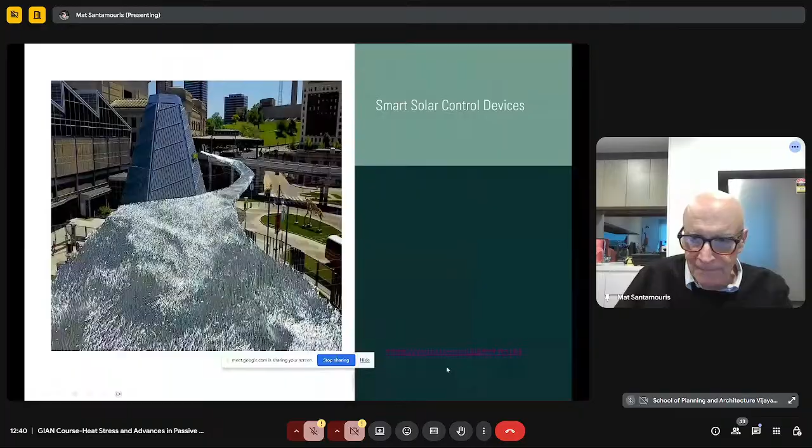There are different and various developments of photonic materials, from paints to very sophisticated ceramic materials, etc., used for different implementations. We have succeeded in having subambient temperatures up to 10 degrees—15 degrees is perhaps an exaggeration, but 10 degrees is fine. A major problem with these materials is that their performance in very humid climates is a small problem, but they can still operate.

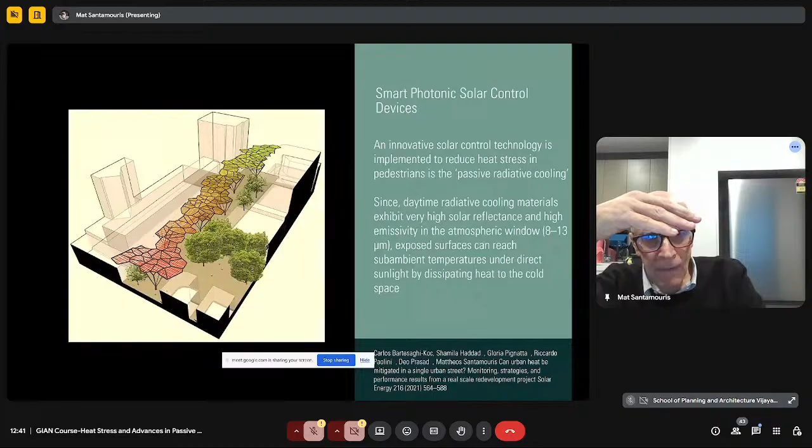I'd like to show you an interesting project we carried out here in Sydney using photonic shading devices, not moving ones like the ones you saw before. We had to improve comfort in a street in the city of Sydney. So apart from putting in cool pavements and greening, we used photonic shading devices incorporating photonic components. These materials present 10 to 15 degrees surface temperature below the ambient one, so once you're below this shading device, along with the benefits of shading, you receive the coolness from these materials, providing comfort.

We have not decreased the temperature further, but we increased comfort tremendously. This real project succeeded in decreasing the temperature and improving comfort in the area by about 30 to 35%, which is very important. These shading photonic device materials are now commercially available.

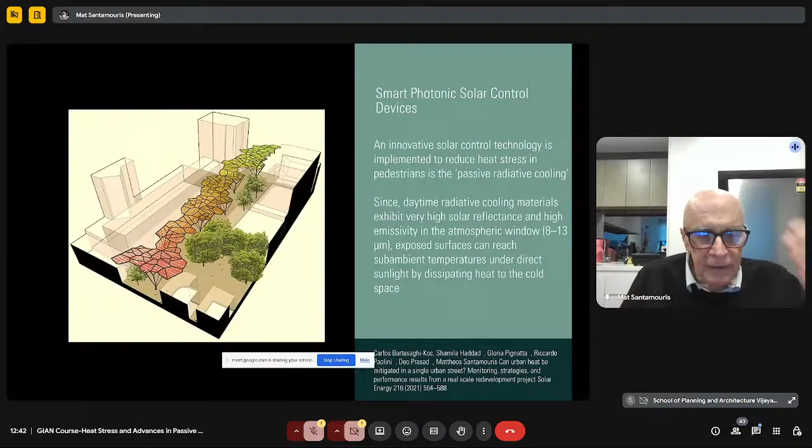We used these materials in a large project in Mecca, Saudi Arabia, where we tried to improve comfort conditions—we remember that last year we had about 1,200 deaths because of overheating. Another important implementation of cool materials is in Riyadh.

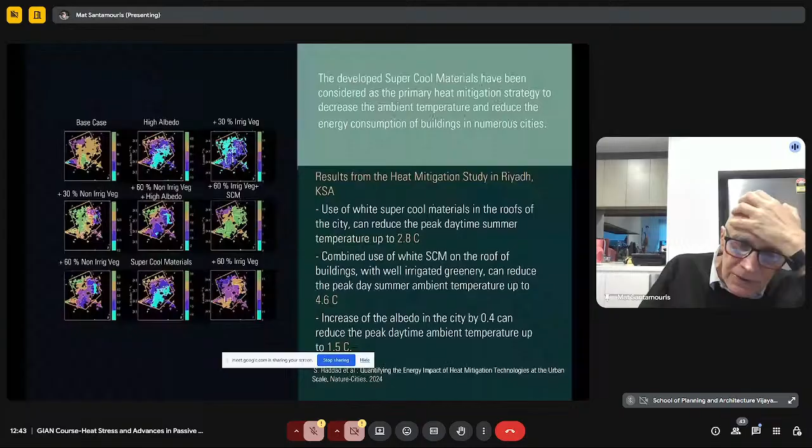I presented this yesterday, where we used super cool materials on the roof of buildings, and together with some greening techniques, succeeded in decreasing the peak temperature by up to 4.6 degrees, and also decreased the energy consumption of the building between 17 to 35%, depending on the materials. I have already discussed this.

Also, a recent study carried out by the Australian government showed that implementation of these materials at the city scale here in Sydney may contribute to decreasing the cooling demand of the city between 30 to 50%. This is a tremendous decrease in demand.

But most importantly, once these materials are implemented on low-income houses—and unfortunately in Australia we have a lot of low-income houses for First Nation people, the so-called Aboriginals, or for low-income people living in cities—once these materials are used on the roof, and this is really something which is measured, we may decrease the indoor temperature by up to 10 or 12 degrees.

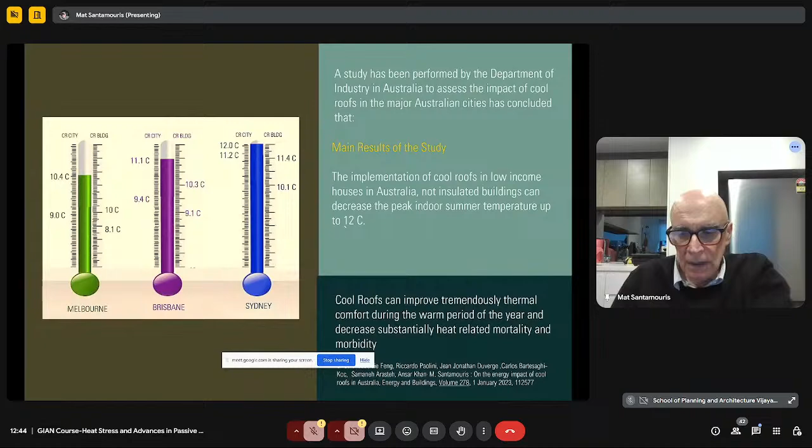So instead of having people living at 40 or perhaps 45 degrees, we can really decrease the indoor temperature during peak time by up to 10 degrees, save lives, provide comfort, and at the same time improve the quality of life of these people.

There is an important study performed by our colleagues from the University of Calcutta, trying to simulate the use of these super cool photonic materials in Kolkata, India. The study has shown that implementation of these materials under humid climate may reduce the peak temperature of the city between 0.5 and 1.5 degrees, which is extremely important.

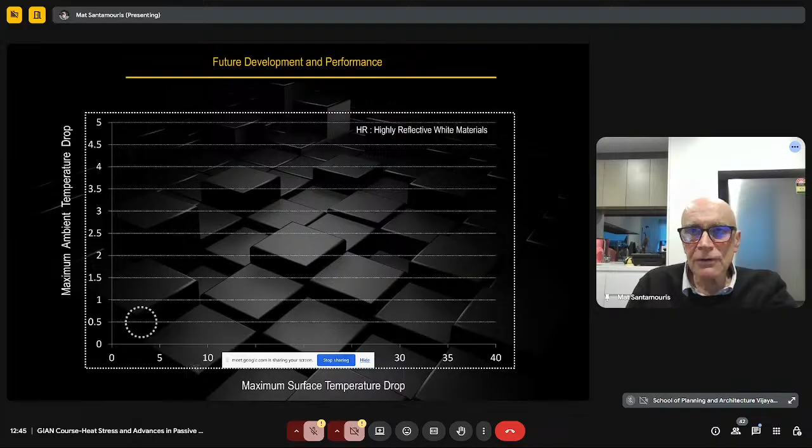So where are we now regarding the development of materials? We started with white, high reflecting materials in the 90s. With these materials, we succeeded in decreasing the temperature of cities up to 0.5 degrees, and surface temperature close to 3, 4, 5 degrees.

Then we continued with the infrared reflective color materials, the second generation I showed you. In this case, we succeeded in having an improved performance, with a decrease of temperature up to 1 degree, and an enhanced decrease of the surface temperature.

And then we developed the infrared reflective asphaltic materials, which also improved performance. Then the thermochromic materials provided very high performance - you see we can have much lower surface temperature and important benefits regarding ambient temperature. There are some problems of stability with the thermochromic materials, but the thermal performance is really very good.

And then we moved to the photonic materials, which really help the daytime radiative coolers, as we call them, to decrease the ambient temperature of cities up to 2.5, 3 degrees, and combined with other mitigation technologies, to decrease the temperature up to 4 degrees.

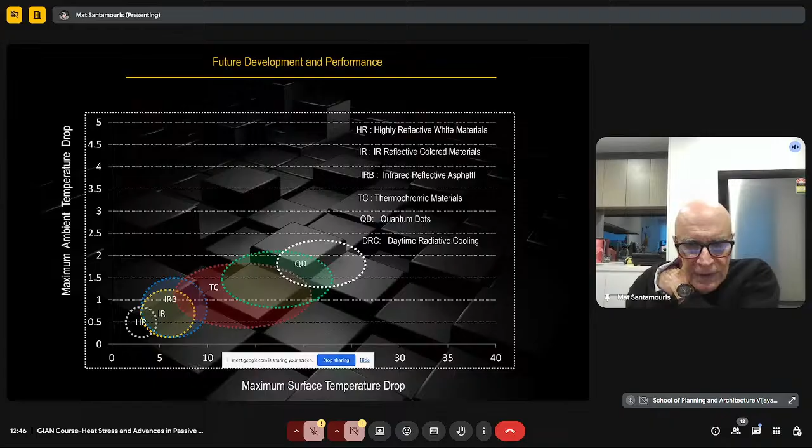So in reality, we have tremendously improved the target from 2.5 degrees maximum mitigation potential we had some years ago. Now we can decrease the temperature of cities up to 4.5 degrees.

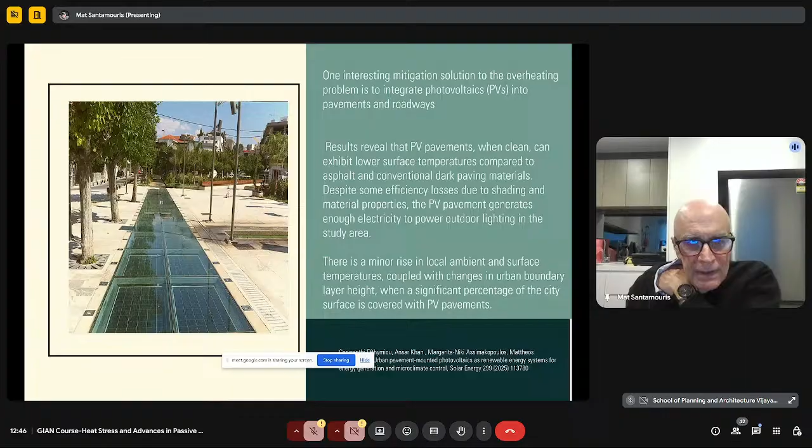Another technology that I have already presented to you is the photovoltaic pavement technology, which may help provide electricity and substitute black asphalt or black materials, while at the same time having lower temperatures.